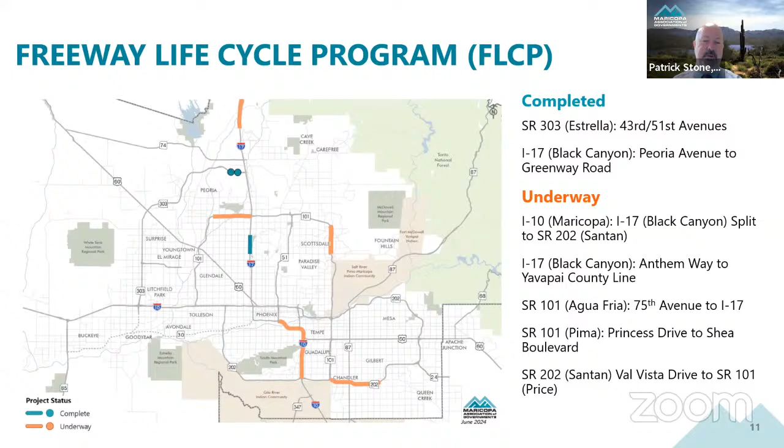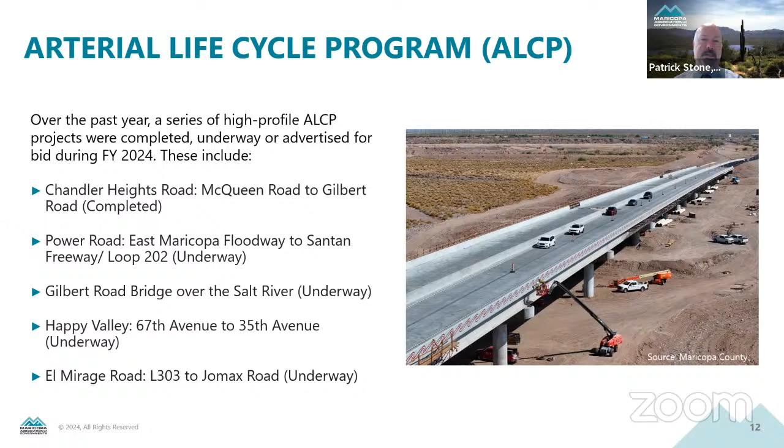And then finally, the El Mirage Road project going from the Loop 303 to Jomax Road in the city of Peoria.

Shifting focus over to the Transit Lifecycle Program. Within the bus component of the TLCP, we did have one route change. That was on Route 48, extending service along Rio Salado Parkway from Tempe Marketplace to Mesa Riverview. In addition, 199 transit vehicles were purchased during 2024, including expansion and replacement buses, as well as paratransit vehicles.

On the rail side, a significant project completion occurred in 2024: the Northwest Extension Phase 2, extending the light rail route from 19th Avenue and Dunlap up to Metro Center. In addition, underway, we have the South Central Extension, which is taking that line down to Baseline Road.

What I kind of wanted to do was take a moment and really celebrate those accomplishments associated with Prop 400, starting with 428 centerline miles of freeway and highway projects totaling over 8 billion dollars.

In addition, we have 308 arterial corridor miles, again totaling over 1.3 billion. And then finally, 130 million bus transit revenue miles totaling 5.6 billion in investments. Those are significant, substantial numbers that show the impact of Proposition 400.

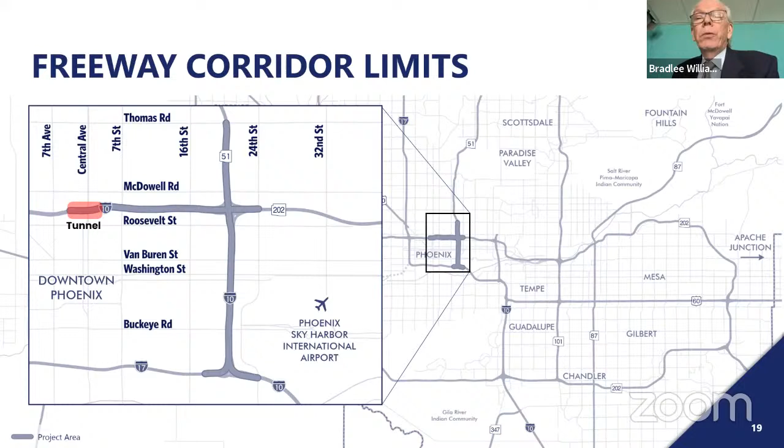This is a high-level study. We're looking for effective and implementable solutions that will become a framework for future projects to be funded through Prop 479.

This is the beginning of a fairly lengthy process. This is the planning phase, or pre-planning phase, where we come up with ideas that we want to move forward with. That becomes the framework for subsequent design projects and, of course, construction after that. There are some issues that will require additional consideration, as I'll discuss at the end of this presentation.

Our planning partners are what you would expect, but there are a few extras. The Phoenix Sky Harbor Airport, for example, is a partner, as well as the Federal Aviation Administration, and that's because we go near Sky Harbor Airport and have to deal with their requirements as well.

We have many objectives: improving safety, operations, access, protecting the surrounding communities, and others.

We are nearing the end of this project. About a year ago, we had a large public survey, and at that point we were just developing alternatives to be tested. We've gone through that process. We have a set of recommended improvements that we want to share with you today.

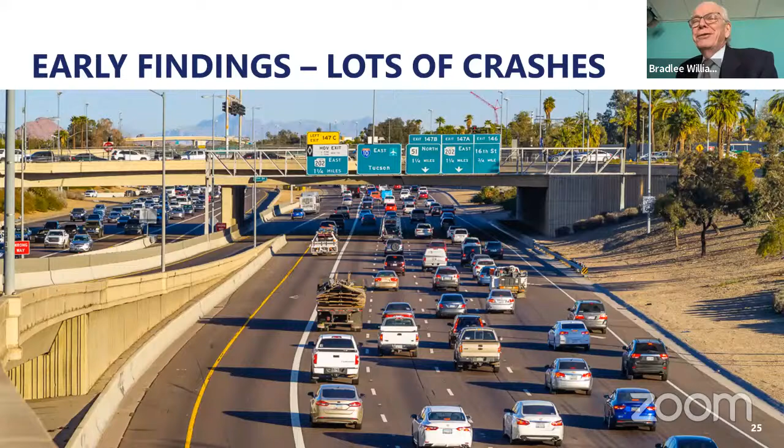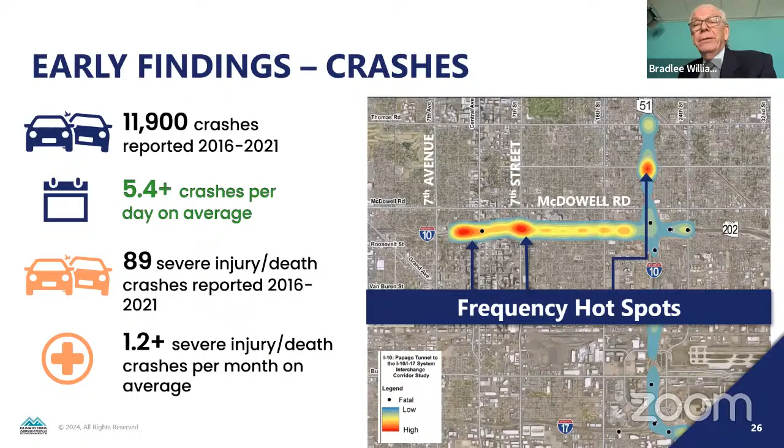We also looked at those crashes that have severe injury or death. You see the temperature map here for those. They tend to be near the interchanges, with an average of 1.2 crashes resulting in severe injury or death per month. The little black dots represent crashes that resulted in a death.

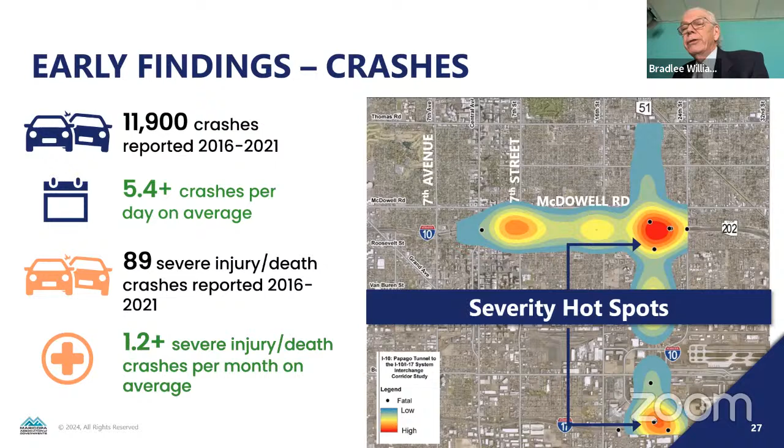We also had some early findings on travel speed. I'm going to take you on a quick trip here where you see on the arrow, we're coming from the mini stack going down towards Sky Harbor Boulevard. If you're taking this trip, things are going very well at the beginning—we're averaging 59 miles per hour—but then things begin to slow down very rapidly until you reach 8 miles per hour by the time you get to Sky Harbor Boulevard.

What's happening here is there's an event near Sky Harbor Boulevard, and the vehicles are virtually stopped. That queue starts moving up and up as the hour goes by. If you get there just as that event is occurring, you can go 59 miles an hour all the way down until you slam on your brakes after you pass Jefferson Street. But by the end of the hour, the queue has gotten so long, you're slamming on your brakes before you get to Washington Street. That's one type of event that we needed to address.

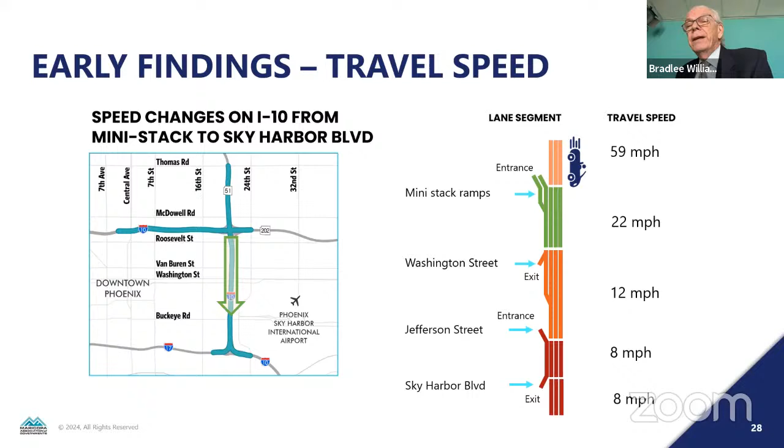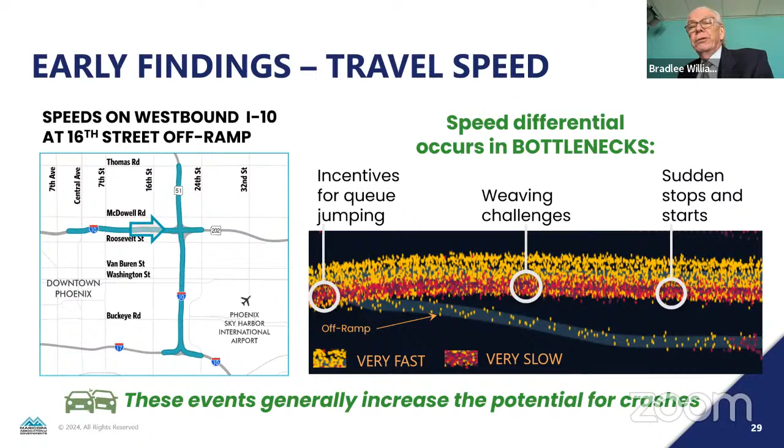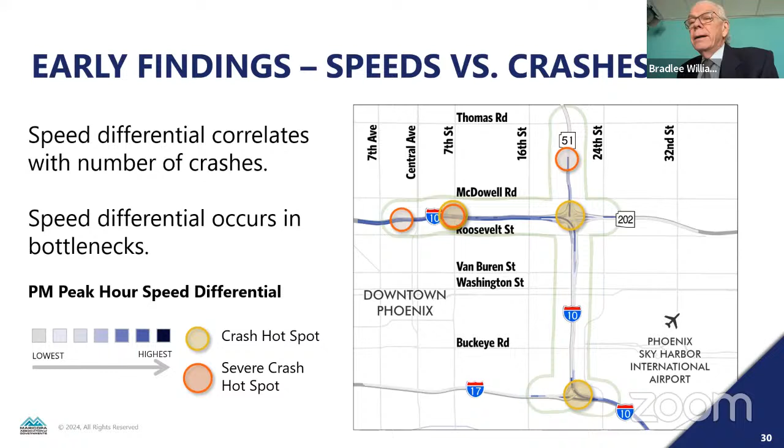What we learned from that analysis is that there is a correlation between locations where you have differences in speed, as described in the previous two slides, and where the crashes occur. Here, the dark blue line shows where you have a large speed differential, with fast-moving cars and slow-moving cars in the same area, and the dots are the hot spots for crashes. You can see there's a real correlation there. It told us that we can improve safety by addressing these areas where we have the speed differential.

Our conclusions at this point were that safety is the highest priority, but we still need to do what we can to increase capacity and reduce congestion.

At this point, we went to the community with our survey, and it went very well. We had almost 2,000 surveys completed.

We asked them, do you avoid this area at times? And the answer was yes, indeed, 56% avoid it for the same reasons: stops and starts, erratic behavior, long travel times. Safety is again at the top.

The next question we asked them was, what's the most important objective? Safety again came up on top. The next one was travel time and ease of travel.

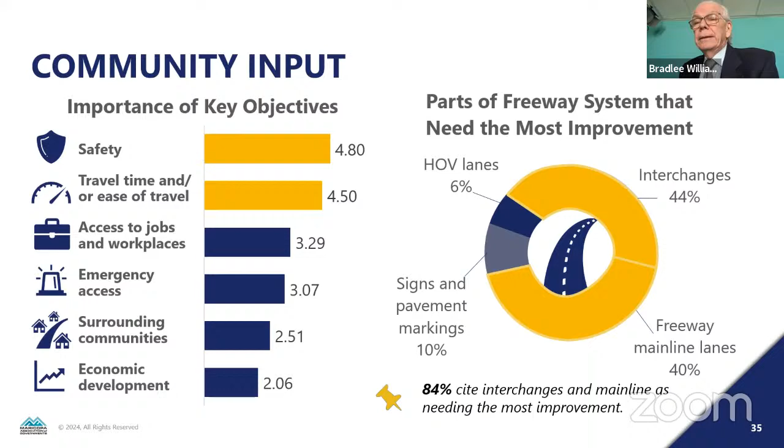So here again, we have safety at the top of the list, and congestion is close following as an objective.

We also asked, do you support making improvements in this corridor? We got overwhelming support, and it wasn't so much what you're going to do, but do something. We approve it.

So the community message confirmed what we had come up with. Safety is the most important objective. We still need to increase capacity, and we need to protect the communities and their access.

Now, the question became, we know that the speed differential is something we need to correct in order to make the area more safe. But how do we locate those places where that begins?

The way we did that is we developed a sophisticated micro-simulation model, and we could start the traffic going through the area at the beginning of the peak hour and carry it through. Before the peak hour began, everything is white, meaning traffic is moving very well. We had no serious problems.

But by the end of the peak hour, it's black everywhere. So the way we found out where they are, we would start the simulation at the beginning, and every 5 minutes we would stop and take a snapshot. As we worked through that, we could see where little black marks started to begin, as shown in the image on the left. Over time, we could track them as they got bigger and more showed up.

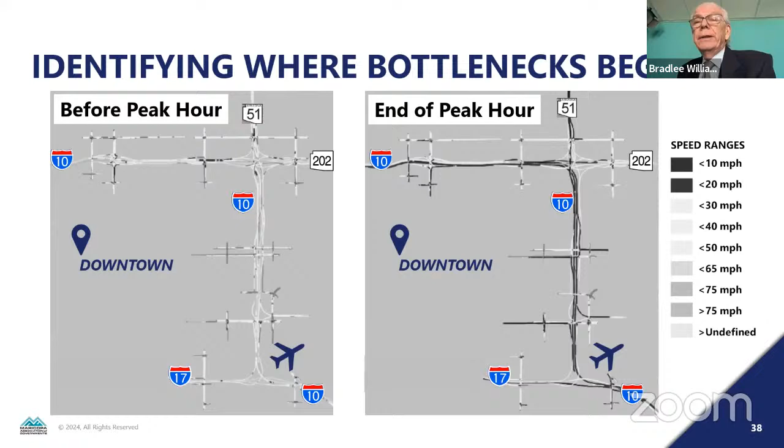By going through that process, we were able to identify 9 locations that we needed to provide improvements to eliminate these bottlenecks.

Now, what do you do once we found those locations? Well, we came up with 2 primary strategies to do that: one is called braided ramps, and the other is called collector distributor roads.

In this image on the left, think of that as the existing condition. This is a freeway section, and you're moving from left to right. On the left side, you have an on-ramp adding more cars into the middle of this section, and then there's an off-ramp on the right that takes them off. So in the middle section, you have more traffic than on the ends, and they're also weaving to change lanes. Now, if there's too much traffic, or if those two ramps are too close together, this can be a serious operational problem.

So the solution in this case is to reverse the locations of these two ramps: take the on-ramp on the left and move it to the right, take the off-ramp on the right and move it to the left. When you do that, the two ramps run into each other, and then you have to build a bridge to separate them. That's what we call a braided ramp.

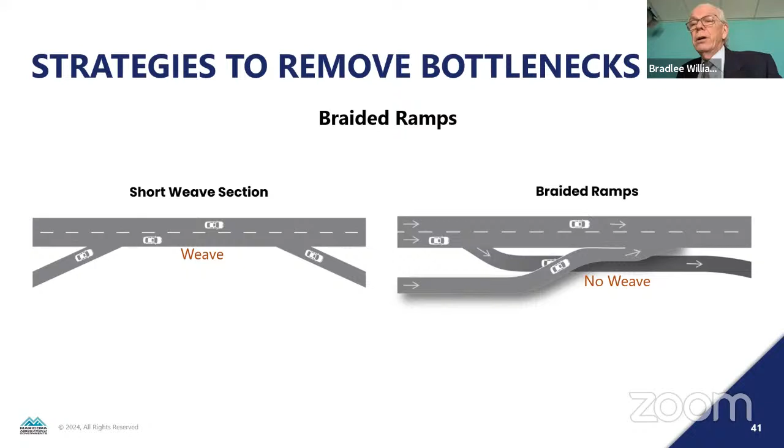Here's an example of two braided ramps. This is at the mini stack interchange, and these are the 24th Street on and off ramps, braiding with ramps to the 51 and the 202.

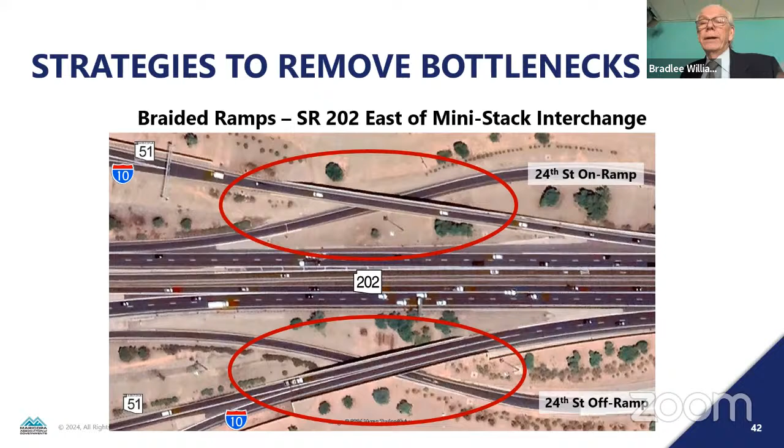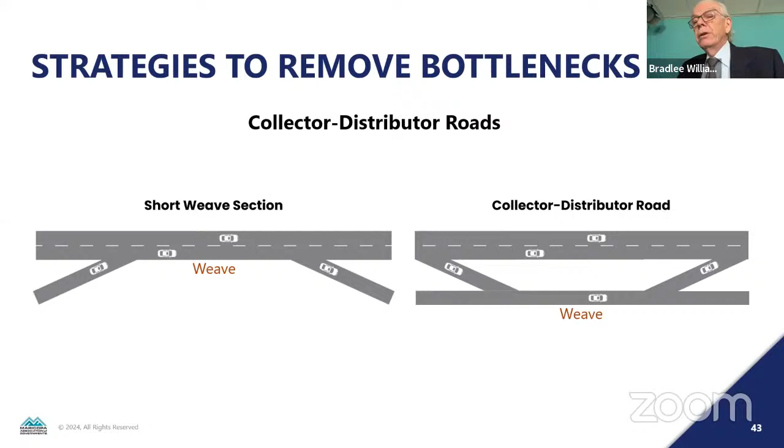The other option is the collector distributor road. The problem is exactly the same—we have these two ramps that we reverse in location. In this case, we push them further apart, and instead of building a bridge to separate them, we connect them to a parallel road, sort of a frontage road. We call this a collector distributor road. What happens in this case is you don't have any cars weaving on the main line of the freeway—all the weaving cars have been moved over to a separate location designed for that weave.

Here's an example of collector distributor roads that are being provided on I-10 at the Broadway curve.

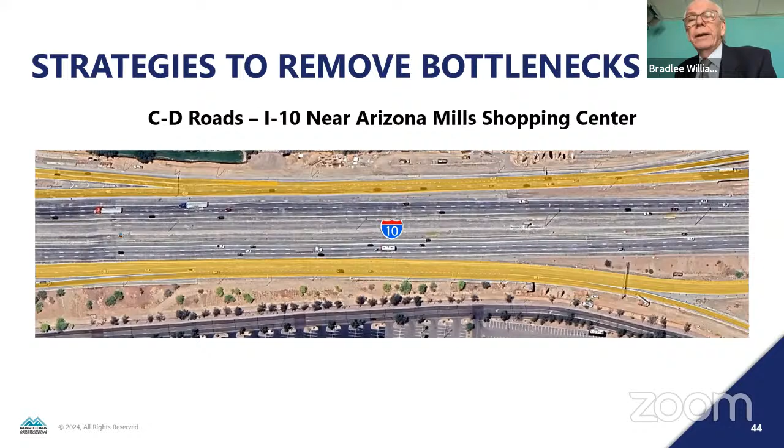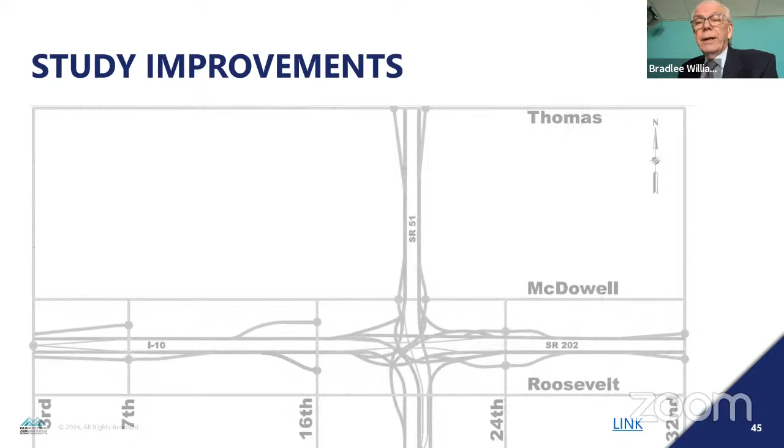So what we've done in this case is we've moved the on-ramp and the off-ramp to 7th Street all the way over to the mini stack.

I'm now going to move to the eastbound side, just below what you see here. You see there's an on-ramp from 7th Street, and then there's an off-ramp to 16th Street. We have another weave problem here. Go to the next slide, please.

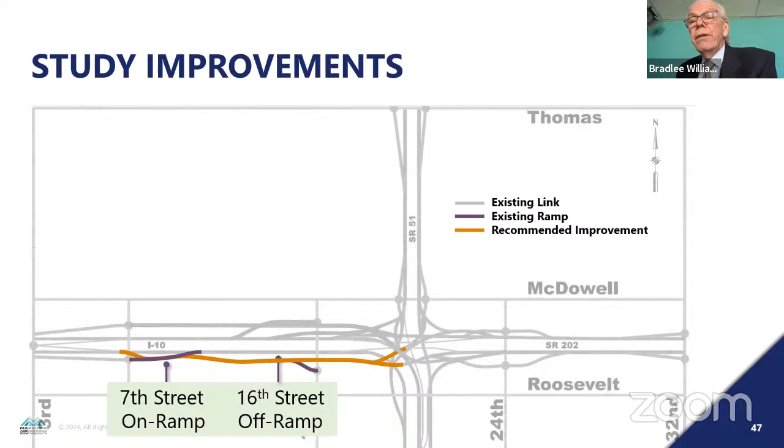We do the same thing. We have a long off-ramp from the I-10 that begins at 7th Street. This time it goes not only to 16th Street, it goes all the way to the 202 and the 51. So we move all of that traffic off of the main line and have it on this long ramp.

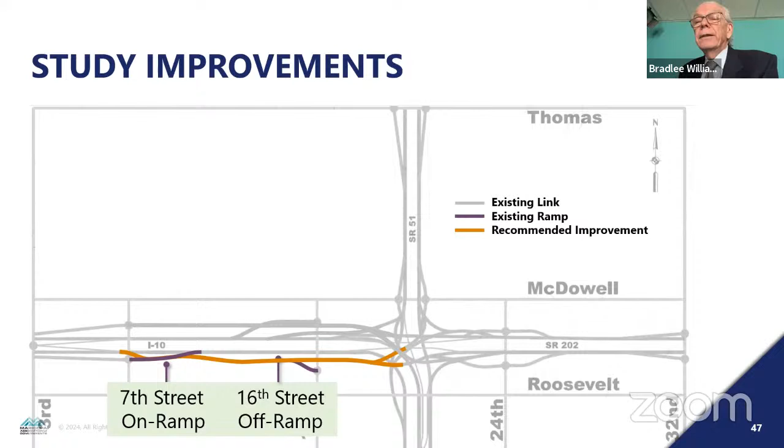Now the next location is going to be southbound on the 51, coming down from Thomas Street. You have an on-ramp from Thomas Street and then an off-ramp to McDowell. Next slide, please. We do the same thing - we have a long braided ramp that moves the off-ramp up to Thomas Road. Go to the next slide, please.

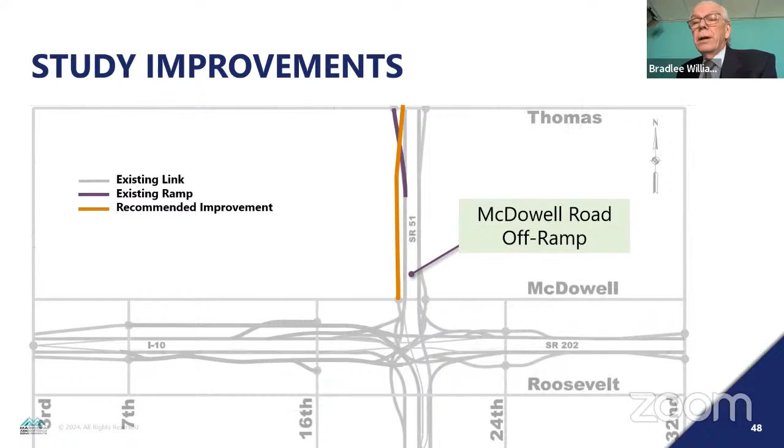Now we're further south near Sky Harbor Boulevard. You can see the purple ramp, which is the on-ramp from Jefferson Street southbound onto I-10. What you can't see is just below that, there's an off-ramp that goes to Sky Harbor Boulevard. We remove that and instead have this long ramp that starts earlier. So in this way, we don't have the weave at that location, and we have a different facility to carry them.

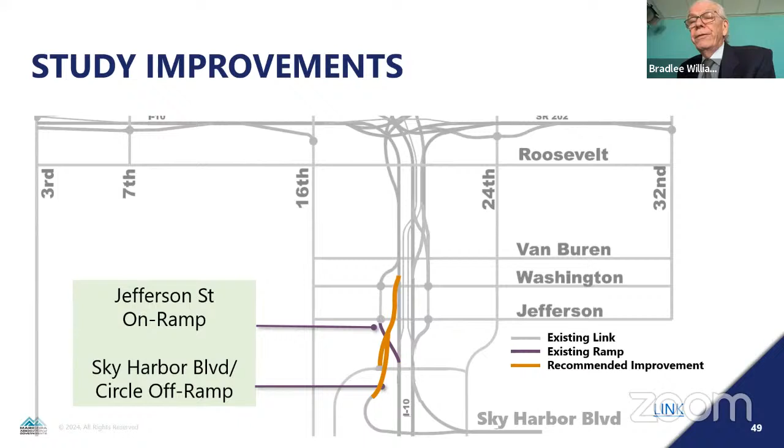We have a similar situation on the other side of the freeway. You can see the on-ramp from Sky Harbor Boulevard is very close to the off-ramp to Jefferson. Next slide, please. We do the same thing again - this time we call it a collector distributor road.

The way this works is if you're on I-10 and you want to go to the 51 or the 202, you get off down there just past Sky Harbor Boulevard on the gold colored off-ramp. You take that all the way up on the collector distributor road to get to the 51 and the 202. If you're coming from Sky Harbor Boulevard, you get on the collector distributor road - you don't get on I-10 right away. You go up to about Washington, and then the on-ramp gets you onto I-10.

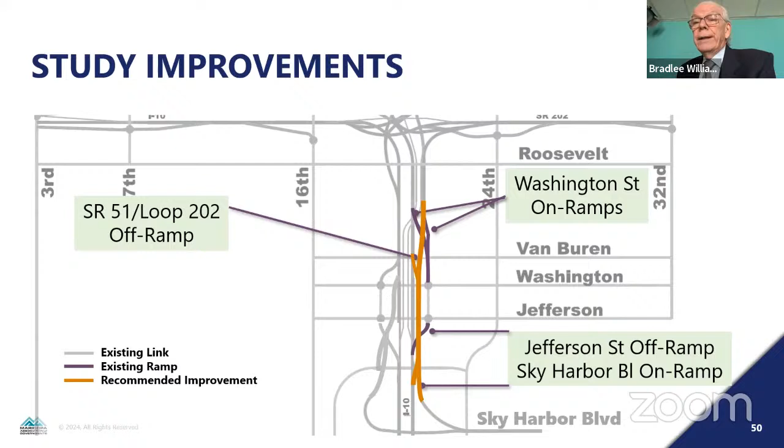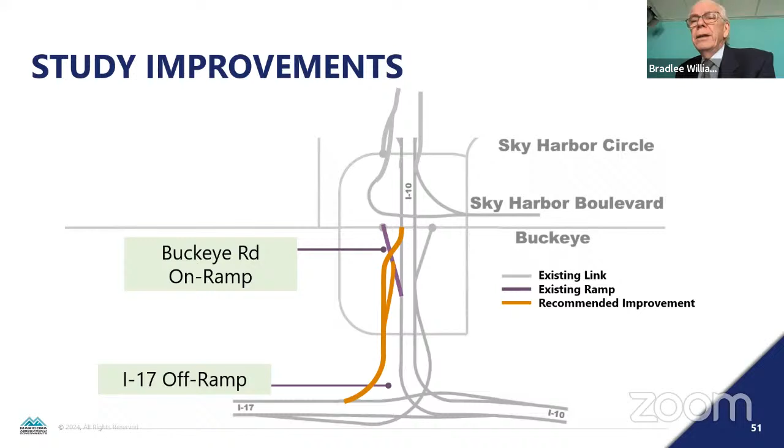Next slide, please. So we do pretty much the same thing here. In this case, we actually have a direct, longer ramp directly to Buckeye Road. So the only people getting on I-10 at that location are people either that are already on I-10 or they're on the on-ramp from I-17.

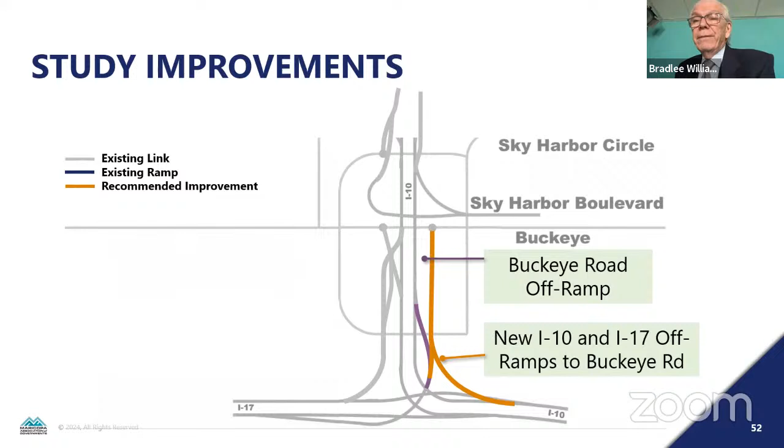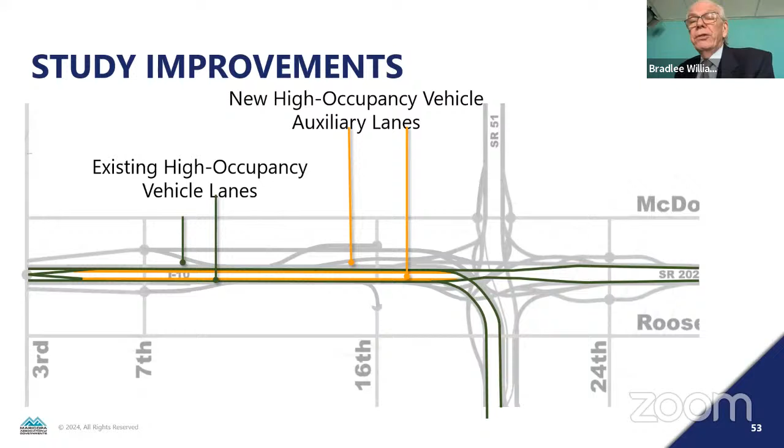The last improvement we're recommending is on the next slide. We're adding a second lane on the HOV system between the connections where the HOV lanes from the 202 and the 10 merge under the mini stack, over to where the direct HOV exit to 3rd Street occurs. That will provide more capacity needed in that section and also make it easier to get in the lane you need for the exit. Next slide, please.

The impacts of these improvements, I'm going to compare them to existing conditions. In this particular case, we used the year 2018 as our existing condition because we had a lot more data to calibrate our models to, but what's happening today is pretty similar to 2018.

Now, if you're traveling from one end of this corridor to the other, you have much more than a 3.4-minute delay, but this is including vehicles that make very short trips, and on average, that averages 3.4.

Now, this is during the AM peak hour. Think of it this way: we have the AM peak hour and the PM peak hour, that's about 4 hours of time when we have maximum traffic. Any other time of the day, traffic is less, and the PM peak hour, I'll get to in a minute, is a bit worse than the AM. So what we're looking at here applies for the whole day, for 20 of the 24 hours, in comparison to what we're experiencing today at that location.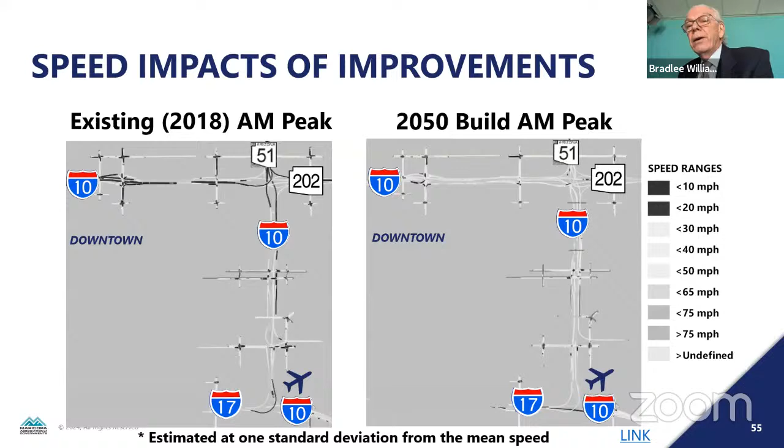You can see this in the imagery, where we have black lines on the left for the existing condition. We also have some black lines on the right - they're not in the same places, they move around, but we still have some black lines. Now, what is the reason for that?

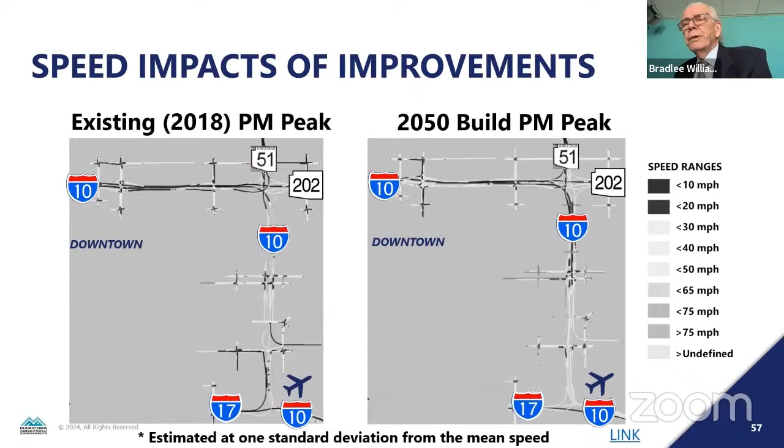The reason is we have some constraints that we have no control over. The easiest one to understand is the Deck Park Tunnel itself, it's pretty much maxed out. We can't make it wider, we have to live with the capacity of that tunnel, which means that during the PM peak hour, vehicles can get to the tunnel, but they can't get through it, and that creates a queue.

We have similar problems with SR 51 and Loop 202, there's just not room to increase capacity on those either. Those are things constraining our ability to get the same level of performance during the PM peak hour. So we need to look at other improvements so we can get some of that peak hour traffic using other facilities, and we also have the opportunity to do additional engineering to improve the results from what we're seeing today.

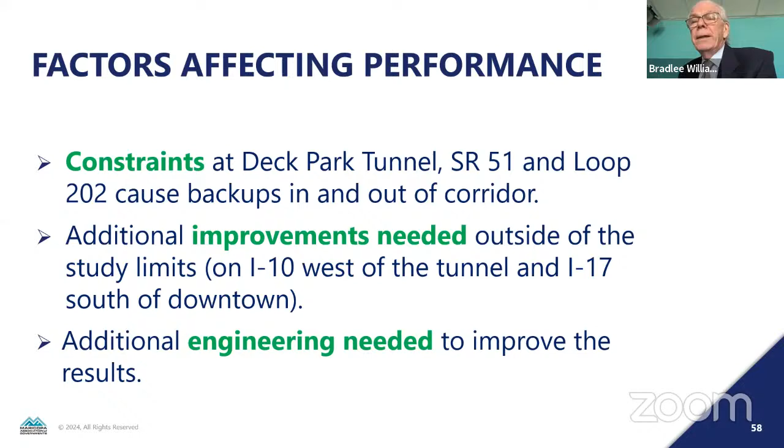So we have issues that we have to address. This again is the beginning of the process, and we can do better than what I'm presenting to you today. We know we need to fix the connection from SR 51 to 7th Street, we think we can do that. We have a similar issue accessing Sky Harbor Boulevard from Jefferson Street, again we think we can do that, but we need another level of engineering to confirm it.

We want to look at other improvements, like on the section of I-17 and other places, so some of that demand can be moved to other facilities. And of course, we're absolutely committed to avoiding any negative community impacts.

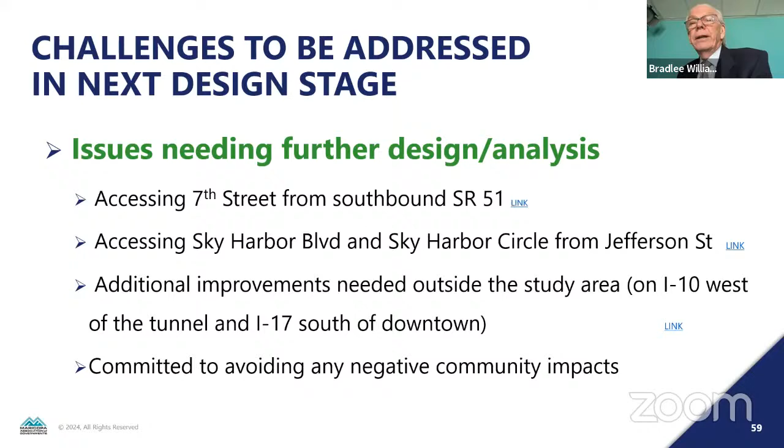Our schedule is that we have just had a public meeting. We're documenting the comments that we received from them, which will allow us to modify our final recommendations, which we're going through right now, and we expect we'll be going to MAG committees for approval on these recommendations early next year.

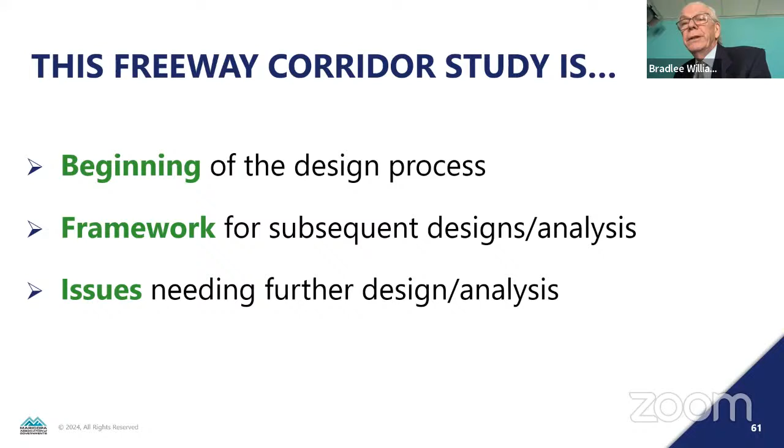Next slide, please. Remember, I said at the beginning that this is the beginning of a process. We have a lot of work to do after this is approved to begin design projects, not only to get them ready for construction, but also to improve on the results presented today. And of course, we have other issues that still need to be addressed. Next slide, please. The end result is to provide a framework of improvements that can be the basis for funding through Prop 479 in the future. Mr. Chairman, that concludes my presentation.

Thank you, Brad. I think with the amount of detail you just went through, you should probably have the rest of the day off. I'm not saying that you can, you have to clear it through Patrick, but I do appreciate the large amount of detail that went into this, and it's complicated, so thank you very much. Do any members have any questions or comments for Brad?

This is Hal Marin. I have one question. Did you look at the incredible disappearing lanes from 51 to 10? Because as you're heading towards Sky Harbor, somebody moving in traffic has to move over 5 lanes in order to exit and get off at Sky Harbor.

Yes, indeed. Thank you for the question. Yes, we did look at that. By creating a longer off ramp, we're able to clean that up so we don't have that same problem of lanes disappearing, as you said, through that section. So thank you for the question, and yes, we are addressing it.

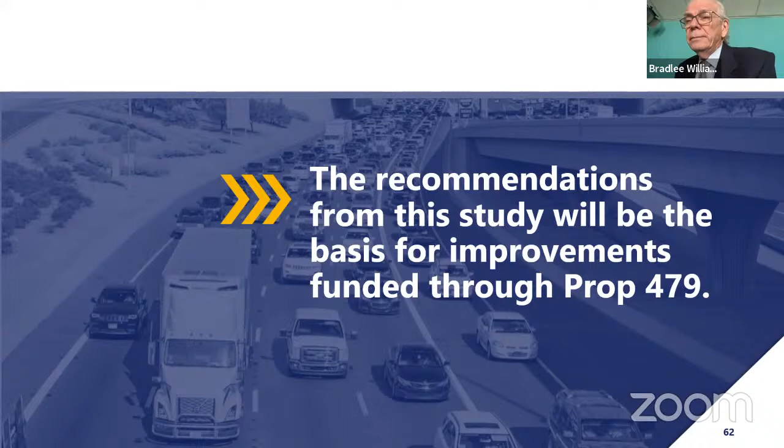I have one more follow up, if you don't mind, Chair. So have we looked into the latent demand? We create capacity and it's immediately filled up by the latent demand, and we are in the same situation.

We did indeed. As I mentioned, we have constraints, so the demand is being constrained by the tunnel and by some of the other facilities getting here. We did show there's a lot of demand that doesn't get through here. That's the case today, and it's going to be the case in the future. Our objective was, number one, to make it a safer experience, and a better experience operationally. We can achieve those things, but no, we cannot meet all of the demand. We're far short of that.

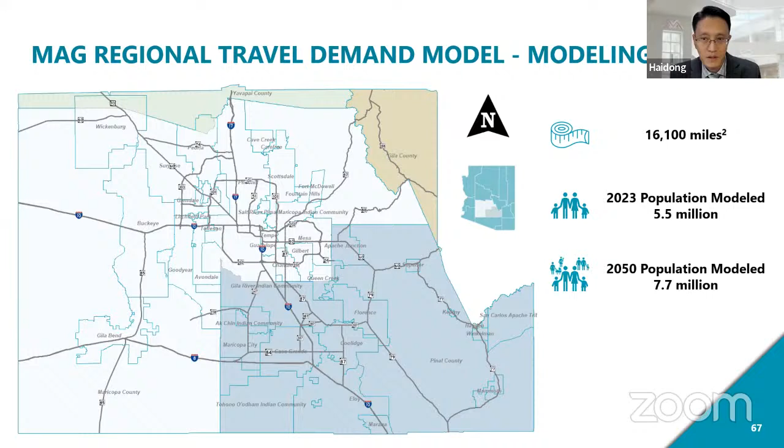Our regional travel demand model covers an area of a little over 16,000 square miles, which for modeling purposes includes the entire Maricopa and Pinal counties, as well as portions of Yavapai and Gila counties on the north. To put things into perspective, this area is about 30% larger than the entire state of Maryland. We're essentially doing more than a statewide model here, in terms of East Coast comparisons. For Horizon Year 2023, we have about 5.5 million population in the model, and by 2050, it is projected to be 7.7 million. Next.

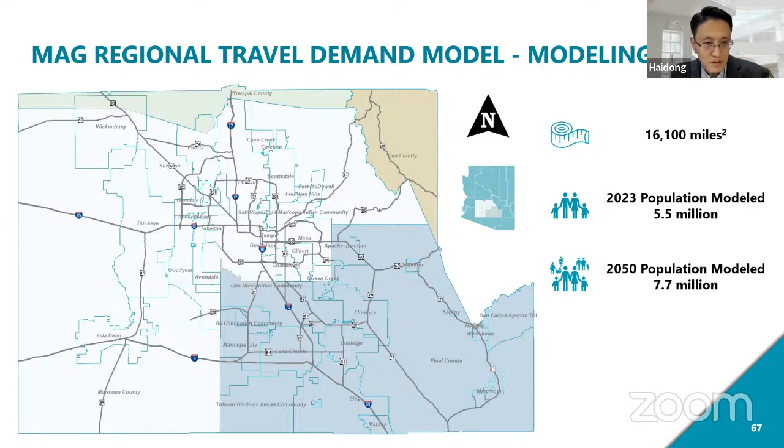The MAG model consists of many submodels and procedures. The main part is called the activity-based model, ABM in short. It predicts the personal travel demand within this region, like going to work, taking your kids to school, going shopping, and the trips from all those activities. The MAG ABM has been recognized nationally and internationally as one of the most advanced travel modeling tools. Next.

The tour-based truck model is also a very important element of the MAG model. It models the truck trips in the form of tours, where trucks start from their depot in the morning and travel to destinations throughout the day, throughout the region, and eventually go back to the depot. Amazon trucks can be a good example. There are also, next please.

There are also smaller components focusing on airport travel, and external related models that forecast trips like to and from the region. Next, please.

In this slide, I'll talk a bit more about the input to the model.

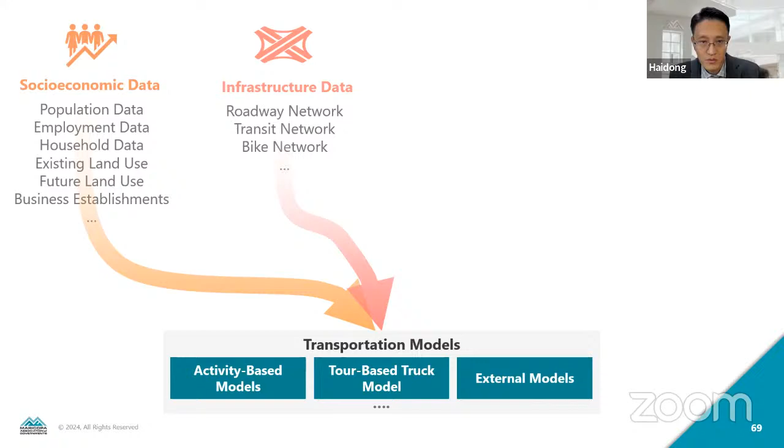MAG also maintains meticulous modeling networks that reflect the transportation investment in this region. The development of these networks won't be possible without input and staff support from all the member agencies.

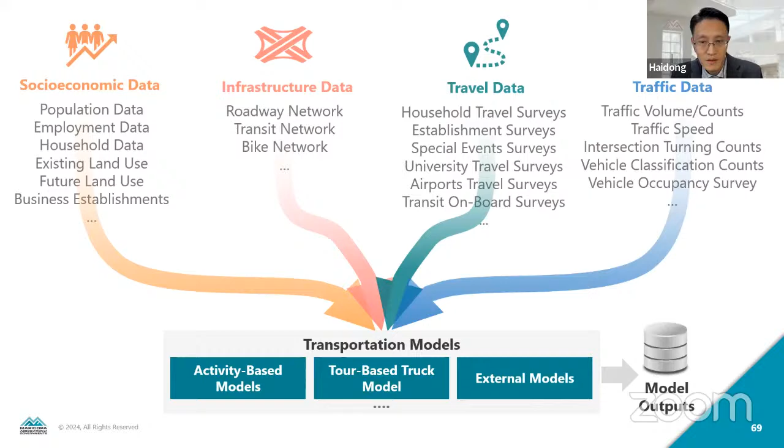To build and update the model, we need a lot of good survey data to help us understand travelers' behavior, so we can replicate that behavior in the model. We also need a tremendous amount of traffic data to validate the model and make sure it does the right thing.

For the modeling networks, we code the relevant projects in RTP, ALCP, FLCP, TLCP, and TIP. Member agency staff also review the networks through the MAG modeling network feedback tool.

This online portal allows member agency staff to periodically go over the network coding for the links within their boundaries and recommend changes or corrections. It's okay if you haven't heard about this—it's a very important step to make sure your city's road and street information is accurately reflected in the modeling network. Please ask us or your staff for more details.

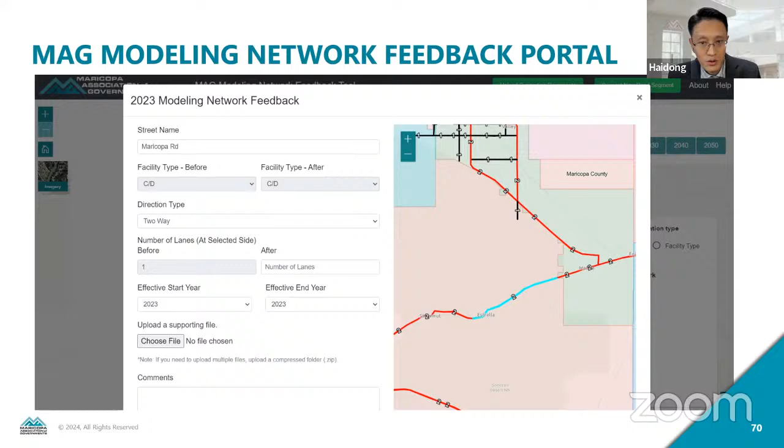Now I'd like to talk a bit more about the activity-based model, which simulates people's travel behavior in detail. As in this simple example, we simulate this person's entire daily itinerary, or tour.

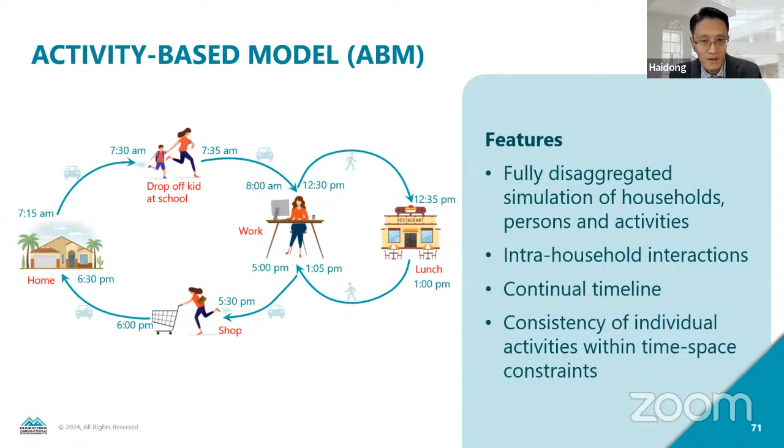From driving her kid to school by carpooling in the morning, going to work right after, and going out on foot to grab a bite at lunch. Near the end of the day, she drives back home with a stop at a grocery store. For both you and me, these are among the travel decisions we have to make every day that have impacts on our transportation system.

Under the guidance of FHWA and FTA, the regional travel demand model goes through extensive peer review processes. The most recent one was conducted in December of 2018, when the peer review panel—a group of national leading experts from academia, peer agencies, consultants, and of course federal officials—

spent 2 days here at the MAG office scrutinizing the MAG ABM model for everything from assumptions, methodologies, implementations, and documentations to the model results.

We then spent a lot of effort addressing the peer review panel's comments, conducting additional analysis, and enhancing the model with new features. In 2020, the peer review panel unanimously recommended the MAG ABM as the model of record for MAG. Since 2021, the ABM has been part of the official MAG model that took on many important tasks.

One of the most notable comments we received from the peer review panel was about the quality of the model results. The MAG model undergoes rigorous validation to ensure its accuracy. The current 2018 base year model has been validated against multiple sources of data, including actual traffic counts, speed data, and origin destination data.

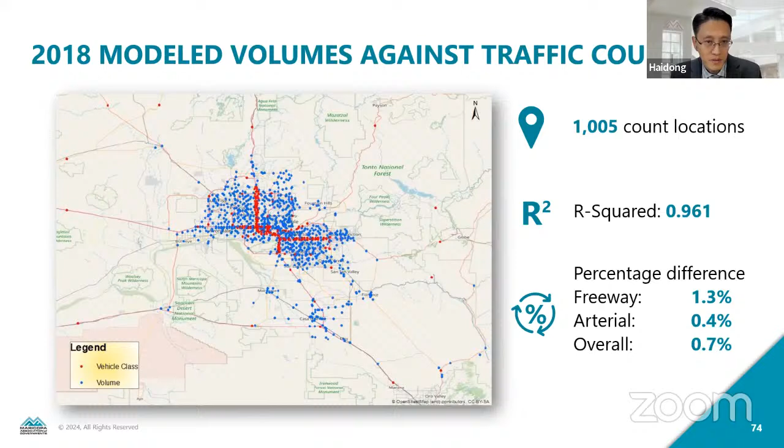The MAG modeling team has been continuously updating and enhancing the model. One of our goals for next year is to make 2024 the new base year for the model once we get a hold of the new observed data.

We have received the 2023 Valley Metro origin and destination survey results, and we have 2 other surveys going on until later this year: the household travel survey and the ASU student survey. We had a little difficulty with the ASU survey, and that may drag on a bit longer.

We're currently laying groundwork for the ABM recalibration by conducting preliminary data analysis and quality checks on the initial batch of survey result records. We're also planning to have our entire truck model recalibrated, which includes heavy, medium, and light trucks.

The second half of 2024 traffic counts will continue in the fall. With the new traffic count data, we'll be able to do a comprehensive validation of the model.

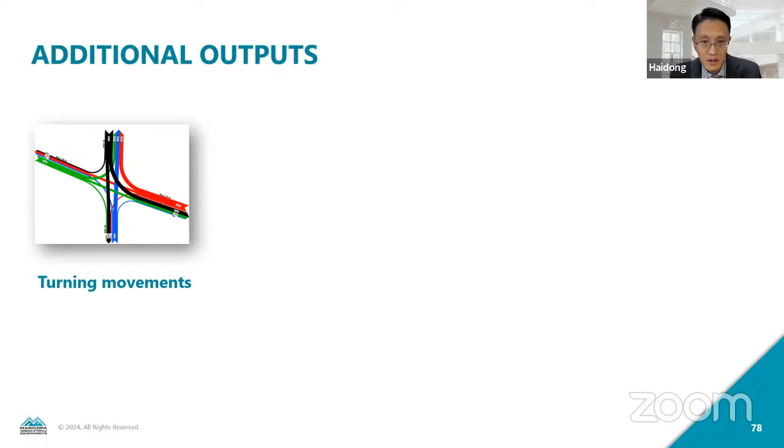Another popular exercise is select link or select zone analysis, which is to focus on one or a group of links or traffic analysis zones to see where the users of those links or zones are coming from and where they're going to.

You may also want to perform a more detailed investigation of travel patterns within a sub-area of your interest. We can use the sub-area analysis tool to zoom in a bit for faster turnaround. It also helps us extract a sub-area network and travel demand for things like traffic micro simulation.

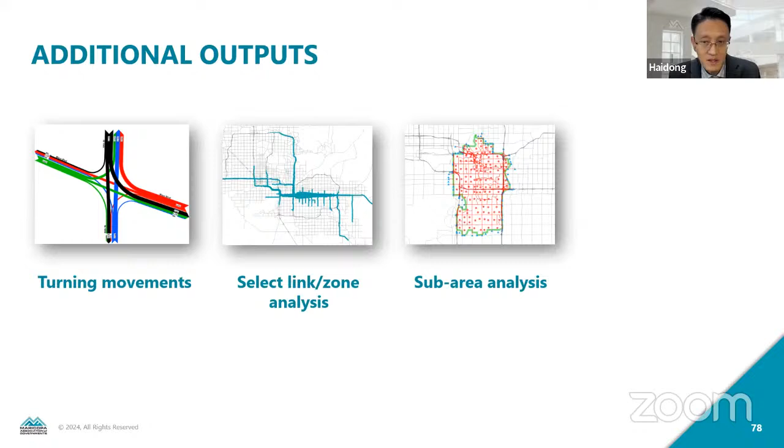Another common request is for isochrones or travel time contour maps. We can generate customized travel time contours for any spot in the region.

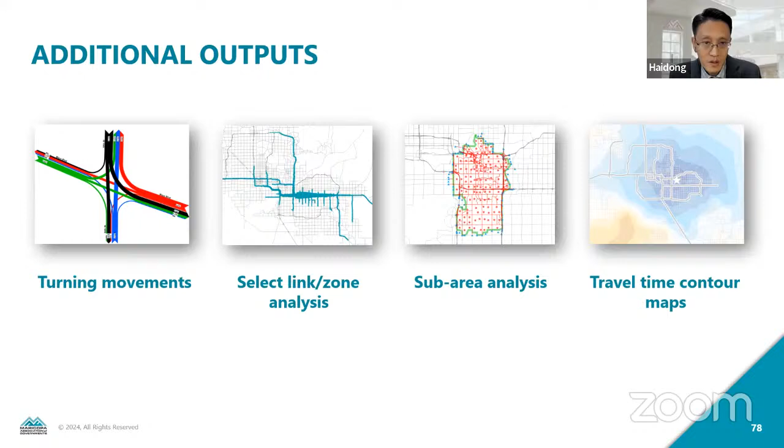With great outputs from the model, the modeling team completes about 150 modeling and data requests per year. So on average, about every 2 days, we complete a request to cater to the needs of MAG and its member agencies and ADOT.

We serve the region with data and insights on a variety of projects, from as small as street or intersection improvements to complex master plan updates.

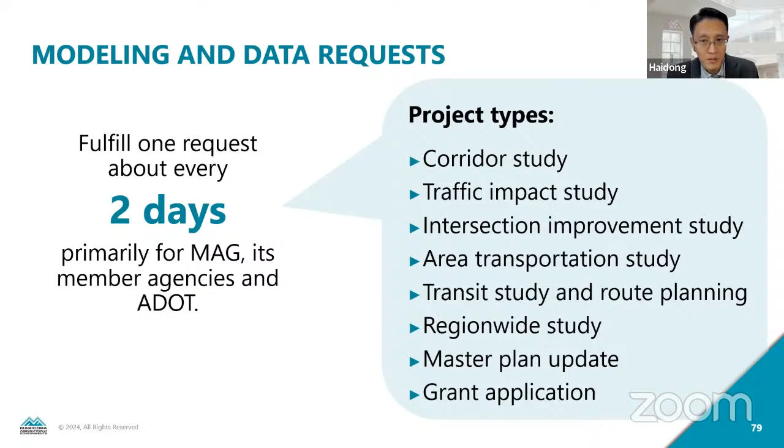In order to properly and efficiently manage and process all those requests, we have our transportation request system, the TRS. We use TRS to assign staff and resources, track progress and due dates, document milestones and deliverables, and much more. Now you know some of the behind-the-scenes stuff.

If you have any requests, please send us an email to requests@azmag.gov. A modeling team member will respond promptly and begin the process to ensure timely and quality completion of your request. Thank you.

And again, that concludes my presentation. For requests, please send to requests@azmag.gov. There's a group of people behind it, so we can ensure that we respond very quickly. And for complaints or compliments, please send to me. I'd like to hear both. Thank you very much.

Thank you so much for the presentation. I would have steered complaints to Patrick, but appreciate you taking that one. Excellent presentation. Does anybody have any questions or comments? All right, thank you so much. And I know I owe you a follow-up. We were going to touch base on the Goodyear portion, so I'll reach out to you after the meeting. Yeah, look forward to it. Appreciate that. Great, thank you so much. Thank you. All right, moving on.